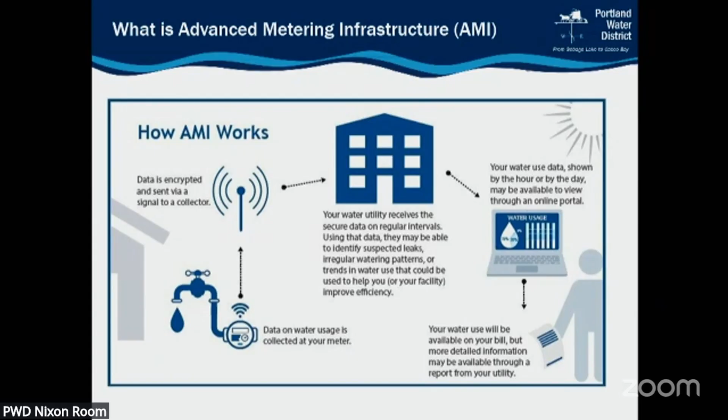That data will also be utilized to generate the bills for the customers, which customers will be able to review in detailed information, ask any questions of the water district, and then also be able to pay bills online.

Okay, so continuing on, we kind of touched on some of these things. The water meters are read automatically 6 times per day, and those 6 reads contain the hourly data packets necessary to provide the hourly reads.

We will be able to detect continuous consumption or leaks. If your meter sees continuous consumption for a certain period of time, it will flag it and send an alert or an alarm. We can also identify reverse flow instances, so if water is flowing backwards from a property, we'll be able to identify that, which can prevent potential water contamination and unhealthy situations.

These systems also ensure fair and accurate billing because we're able to capture much more frequent data, so you're able to understand usage at a much more detailed level. It also will help PWD reduce their carbon footprint because they won't have to roll trucks or float boats to read meters, and in some instances be able to troubleshoot that technology as well.

Pressure monitoring will be another capability of this system. The water meters themselves have pressure sensors and temperature sensors. Currently, PWD only has about 24 to 30 different pressure devices throughout the system. This can help prevent things like main line breaks and low pressure situations throughout the entire district.

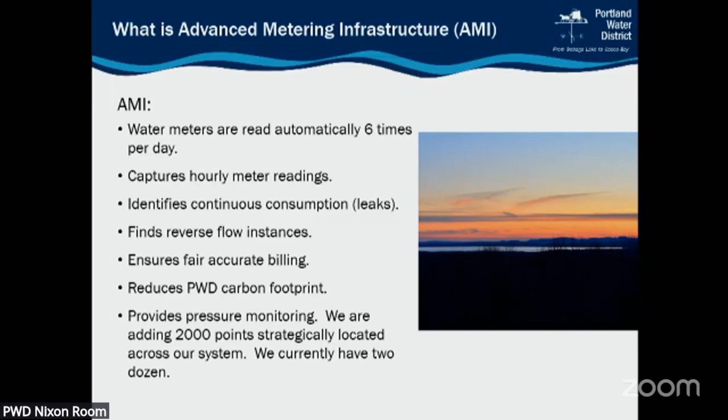The one on the left is called the Sensus iPERL. That again is a static water meter, so there's no moving parts, with extremely high low flow sensitivity. Then we have the Sensus Ally meter. Now, the iPERL meter has actually been being installed at the PWD since 2016, so this is technology that the district is used to.

The Sensus Ally meter also uses the same measuring technology as the iPERL, but in addition, it has pressure and temperature sensors built right into the meter. It also has a remote shutoff valve, which will allow PWD to service accounts, in particular snowbird-type accounts where people are leaving for the winter and want their water shut off. Instead of PWD having to travel to the islands, they'll be able to turn that service off right from the office here.

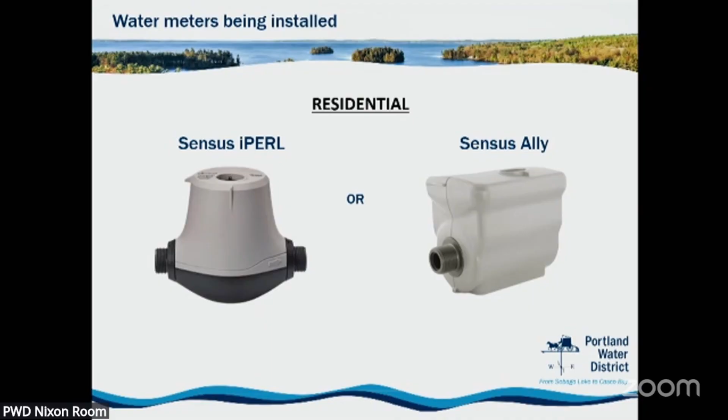These are pictures of the commercial and industrial meters. On the left is the Sensus Cordonel meter. Again, this is a static meter, it has no moving parts. All of the new meters going in have 20-year accuracy warranties, which guarantees that the meter will stay accurate for the next 20 years. That's true for the Cordonel and the previous meters you saw on the screen before.

The Omni meter on the right-hand side is a great meter that PWD has been using for years. There are quite a few of these out in the system. Some of them have not reached the end of their useful life, so you will notice some of these meters at certain properties, and PWD is going to continue to use that technology until the end of its useful life.

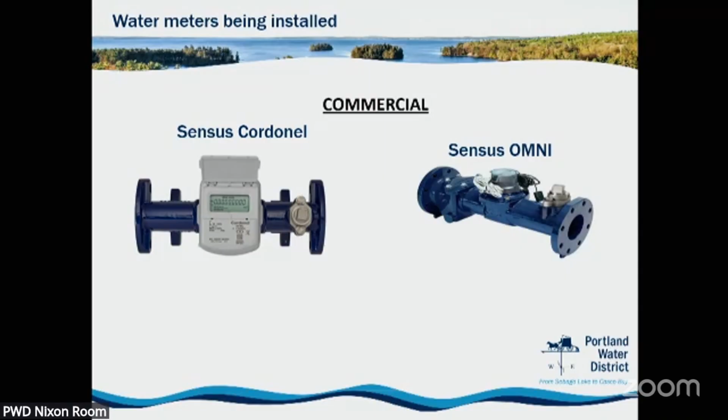Those meters, the Sensus Omnis, have about a 10-year battery, whereas the Cordonel is now a 20-year battery. So quite a bit of an advantage with the newer technology. Anything you want to add at all, Peter? No, I think that's good. Okay.

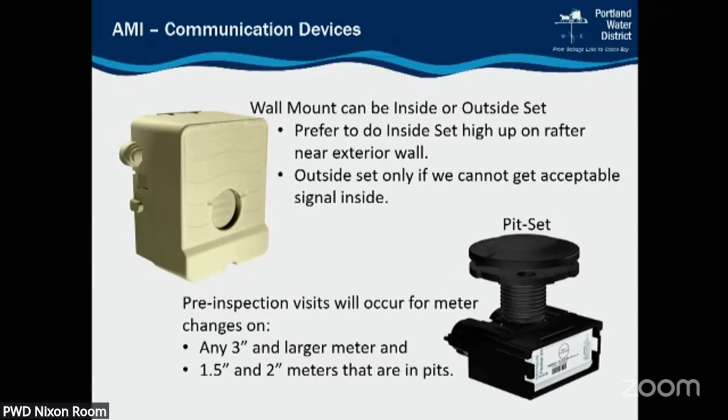So a project this size takes several years to get through, and we have a plan to step through our service territory in a very controlled manner, similar to when we did the installations 20 years ago. We'll have certain areas that we release to Core and Main and VEPO Metering, and in turn they will communicate to those customers with a letter that explains that the customer can go online or call to set up an appointment so their meters can be changed.

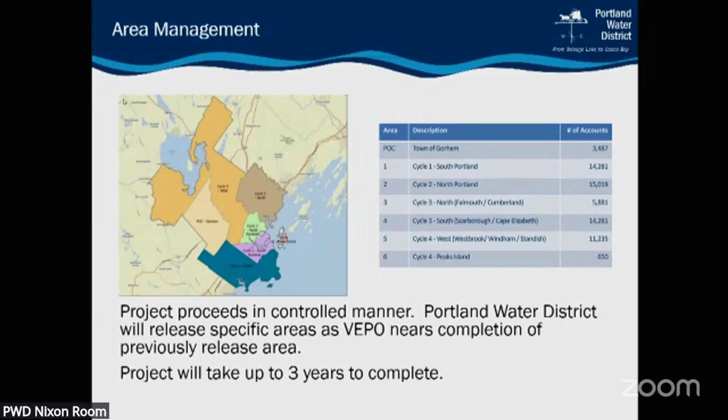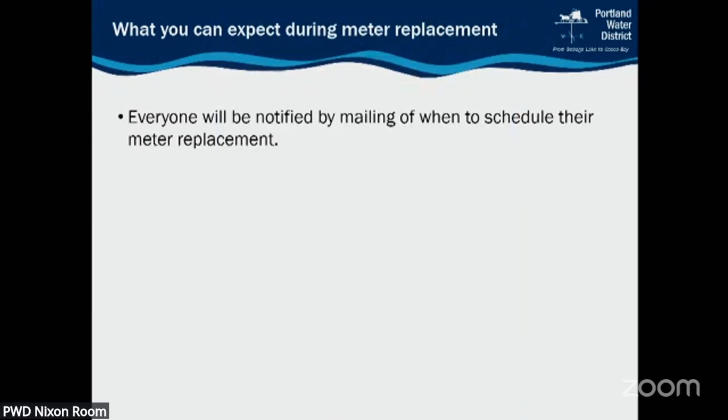Once you schedule your appointment, customers will receive a confirmation, typically via email or a cell phone text message, depending on the information the customer wants to provide. They will also get a reminder 24 hours in advance of their appointment.

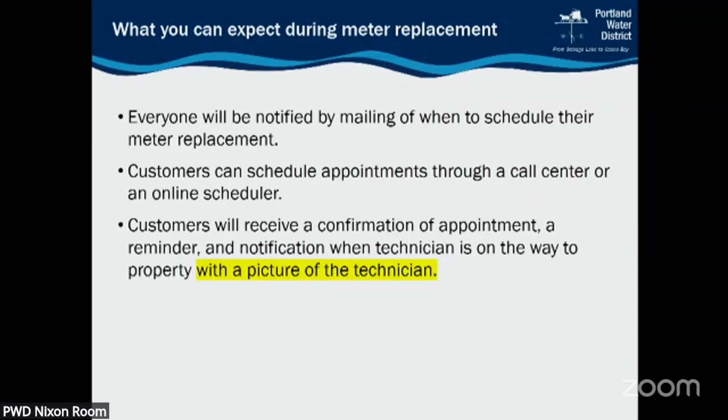And then the day of their appointment, they will get a notification in real time of when the technician is on their way to the property, and they will also have a picture of the technician available. This is for safety reasons, to make sure folks are letting the right people into their homes to do these meter changeouts.

This is an example of what the technician will look like when they arrive, and you'll receive a picture similar to that on the left when they're on their way. The technician will knock on the door and identify themselves. They'll have an identification badge on their front left chest, as well as a safety vest like you see in the picture. All of their vehicles will also be marked with the logo you see underneath the picture - magnetic signs on all the Vepo Metering vehicles.

The water service will be briefly interrupted, typically 30 minutes or less, so it's a fairly quick process to change out these meters. The technician will test the meter and ensure everything's working, making sure there's water service back to the property.

Customers do not need to pay anything out of pocket during this installation process - you don't have to worry about that. Someone 18 years of age or older must be present for the meter installation, just so that there's an adult on the property and all safety concerns are taken care of.

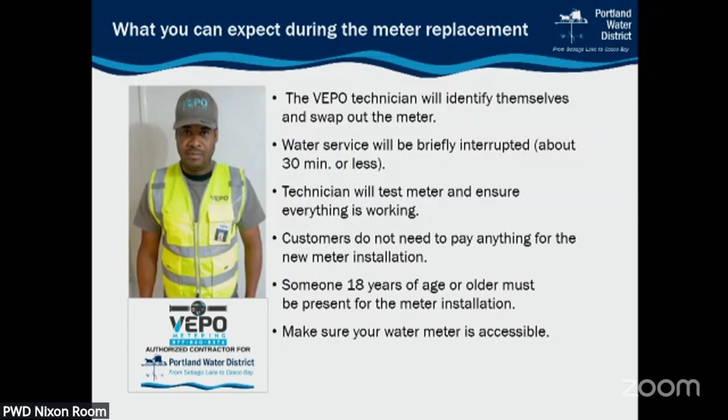And make sure your water meter is accessible. So if you get a chance before you schedule your appointment, look to see where your water meter is. Just pretend that you have to be able to put two hands on that water meter. If you can't, because it's behind drywall or in a vanity or something like that, you will have to make some preparations to make that meter accessible.

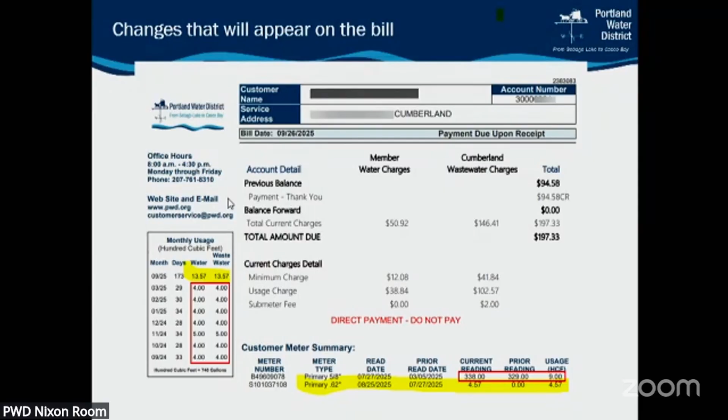So 10% of our customers have sub-meters. This is a meter that measures usage that's not going back into the sewer system. So if you're irrigating your lawn, for example, you have a sub-meter before your outside spigot, and that usage measured by the sub-meter is used to deduct usage when calculating the sewer bill.

Customers that have a sub-meter can expect to receive a letter from the Portland Water District about the sub-meter, and it will also provide the year-by-year usage since 2018, so you get a sense of how it's worked for you over the years. Then you can make a determination if there's value to keep your submeter or discontinue it. In that letter, you'll receive detail using your current 2024 rates showing the value.

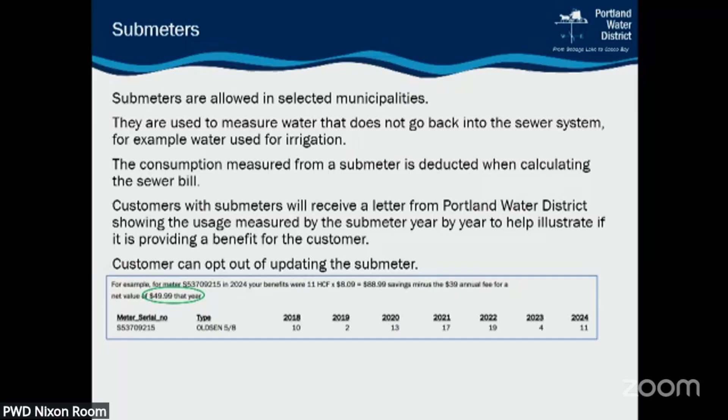In this case, this customer who had 11 HCF in 2024 through their submeter effectively saved $50 having that submeter that year. But another customer whose usage pattern is different would be losing money, spending nearly $23 a year just to keep the submeter. So ultimately, it's up to the customer to think about how they use their submeter over the next number of years and if they want to keep it or not.

So you can opt out of your submeter being updated.

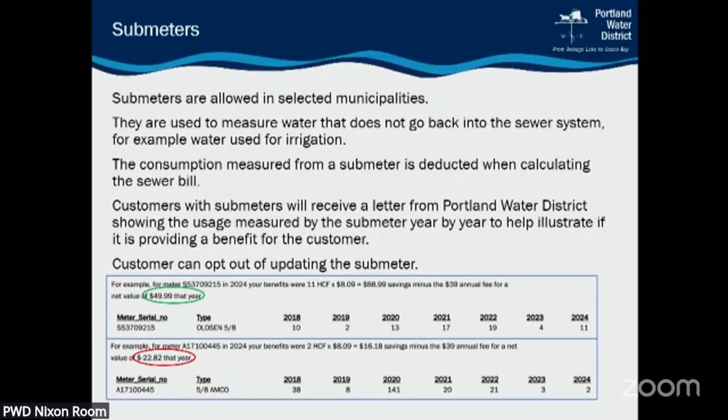So what can customers do to prepare? Is this me?

We talked a little bit about this before, but participation in this program is required by PWD. Please make sure your meter and submeter is accessible, so if it's behind furniture or a wall, make sure you can access it. Please make sure you have somebody 18 years of age or older present during the appointment. For more information, you can go to the PWD website, there's a specific page dedicated to this AMI and water meter changeout program.

So just to summarize a little bit, the benefits the customer and community receive from this are increased accuracy in billing, and hourly consumption data you'll have access to when we publish on the new portal, which will be late 2026 or early 2027. So even though some customers will have their new meters for a while, it'll be a bit before we get that out there. Faster leak detection is another benefit.

We've talked a lot about this, but if you think about it as a customer today, you usually find out about a leak when we bill you. In this new world, we'll be able to see continuous flow going through your meter. You can set alerts, we can set alerts, and we can actually address it before the bill. So there's a lot of potential there. Improved service, faster response times, better information.

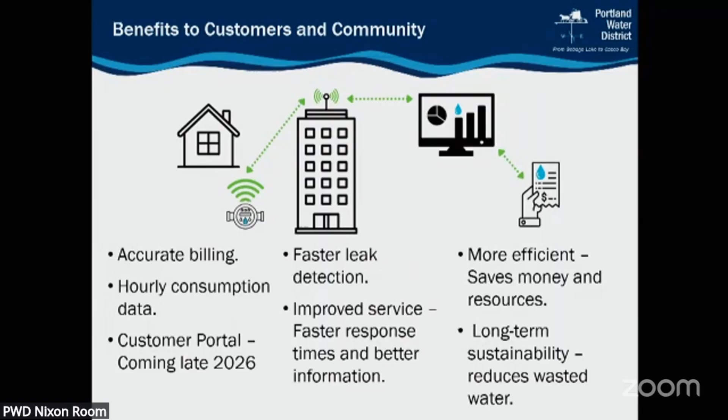And because we're not driving around as much, there's a carbon footprint benefit. We can also be more aware of how water is being consumed throughout the district, leading to working with our infrastructure in different ways. So there's a lot about this information that's going to change the way Portland Water District can operate. So we'll take questions.